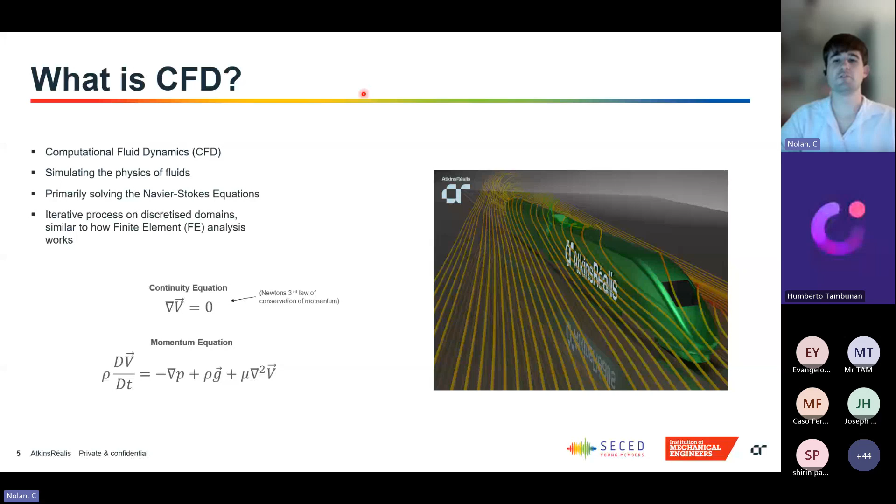So what is CFD? CFD stands for computational fluid dynamics. That basically means simulating the physics of fluids. This normally means solving the Navier-Stokes equations. There's lots of other equations and physics that can be solved in CFD, but primarily it's the Navier-Stokes equations, which are classically unsolvable analytically. So instead we use a computational process where we're iterating to get towards the correct result. This uses discretized domains, using finite volume approximation, which is quite similar to how finite element analysis works with finite approximations, and using an iterative process and making sure that you're converging on the correct result.

So some of the motivations for CFD: we can use it for lots of different applications, normally in project design or safety assessments or performance assessments, or looking at ways to optimize different designs. One of the things that we find works best for CFD is when we come in at an early stage in the concept phase. So looking at making a design more efficient or perform better, or highlighting some of the weaknesses in the design or providing some remediation to the current design to improve its performance. But that does require either the client or the engineering team that we're working with to have a very clear definition of what performance criteria they're trying to meet.

So sometimes this comes from your standards. It needs to meet the standard for it to pass. And sometimes it's a bit more complicated. Sometimes at the early phase, the client isn't really sure exactly what they mean when they say they want it to perform well. So part of our job is trying to help the client understand what they can expect from the CFD experiment, what sort of data output they'll be getting, and what criteria they're hoping to achieve in that.

One of the big drawbacks of CFD as well is understanding the uncertainties involved. We're running these simulations and we get some results, but we never know exactly how accurate they are. So a lot of our work goes into designing the simulation and looking at all of our different inputs and understanding what effect changing different inputs has on the final result. And again, it's really important to understand what our output is going to be at that phase so that we can see, okay, if we change the time step, if we change the physics models, what effect does that have on the specific output that we're concerned with? And that allows us to give more robust simulations without having to do a full experimental campaign to validate all of our simulations.

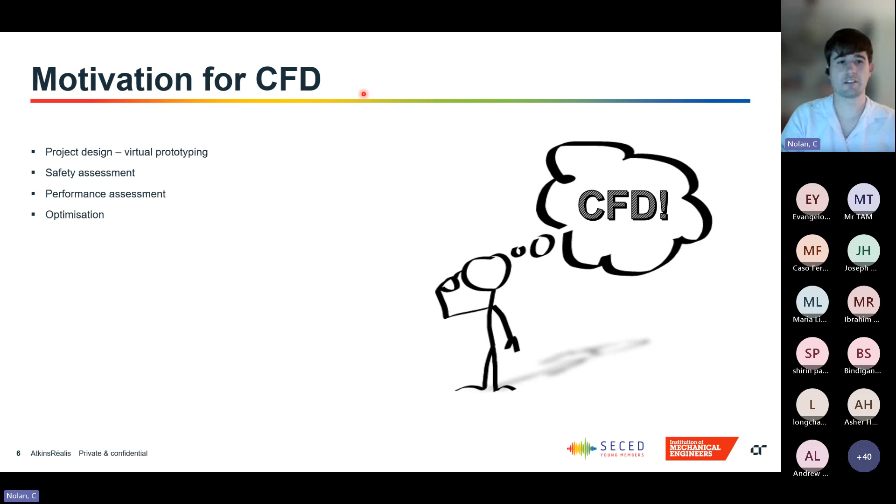So when we do start a project, there's a bunch of technical considerations that we need to think about. The first one, obviously the main one, is what physics are involved in the problem. So as I said earlier, there's so many different types of physics models that can be applied to modern CFD softwares. And if we turned all of them on, it might give you a more accurate result, but what's actually going to happen is the whole solution is just going to grind to a halt. It's not feasible to do every single physics model all at the same time.

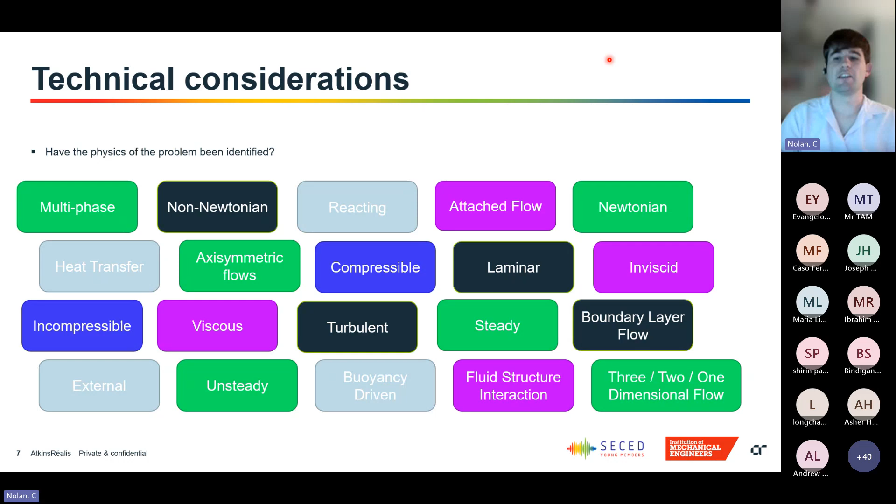So at the early stages, we need to identify what are the main physics that are going to be influencing the problem that we're working on. So is it a heat transfer problem? Is it a buoyancy problem? Is it non-Newtonian fluids? Is it multi-phase? Things like that. And understanding which ones are the important ones and which ones we can ignore.

In the same way, if we were looking at a road vehicle, say, we would make a big box, which would be our air, and then we would cut the vehicle out of that box, and you would be left with this sort of inverse, like a box with a car-shaped hole in it, and then you would simulate the flow over that. So the solid geometry that we're using is actually the fluid, rather than the structure that would be simulated.

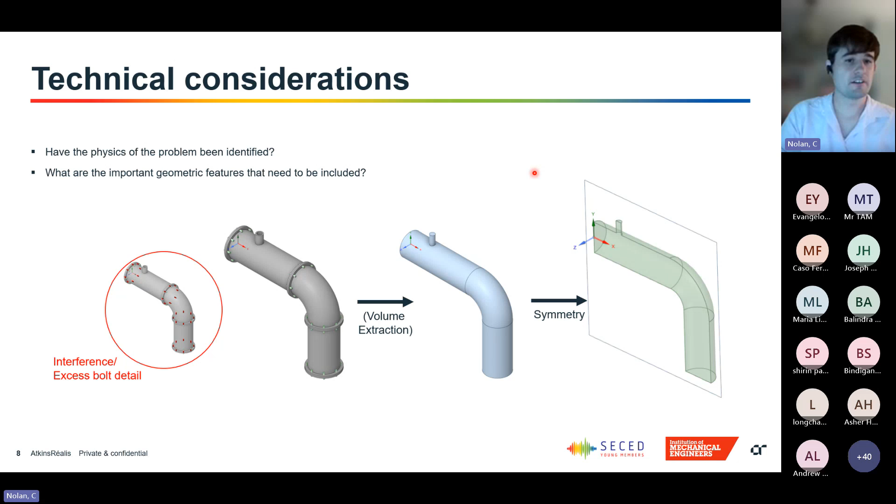And again, having a good understanding of what the client wants as an output is very helpful in this stage, to understand what detail is going to be relevant to the solution. So looking at surface roughnesses and things like that. And for this example, we're able to implement some symmetry. Obviously the pipe's symmetrical, so that allows us to cut down on some of the computational complexity that's going on.

And then one of our final technical considerations at the early stages is the mesh. As I've touched on before, we have to discretize the domains. That means chopping it up into either cubes or polyhedrons or whatever shape you want, really. And what we find is as you make the cells smaller, you're able to better resolve the gradients, whether that's a pressure gradient or a velocity gradient or a temperature gradient or whatever it is that you're trying to solve. However, it's not feasible to have tiny cells everywhere because that's going to really increase your computational cost. It's not unusual for a solve to be 6 to 10 hours. These aren't quick things that get turned around in a matter of minutes.

So it's really important to focus the computational effort around the bits that are important. This goes back to where having a really clearly defined scope and a real focus on what the output needs to be at an early stage allows you to better target your computational resource to exactly what the problem is going to be. And we do a lot of testing on this, so we would often do mesh dependency studies where you're looking at what's the minimum cell size required to resolve this gradient correctly.

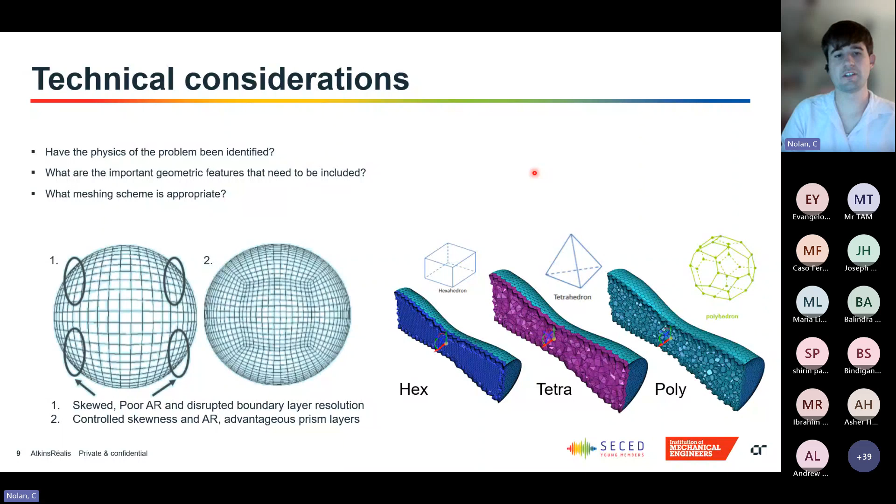So what we tend to try and show is that if we take a coarse cell and then we slowly make that cell smaller and smaller, so we make the mesh finer and finer, focusing the mesh on the important regions, we want to see that the solution converges onto a set solution, and then it becomes independent of what the mesh is doing. And that's the best scenario, that you have a completely independent answer to whatever mesh you're putting on. So that's an introduction to some of the technical considerations that we think about when we first start a CFD study. I'm now going to move on to a short case study.

Well, obviously there's a lot of complex physics going on in this scenario. So we have compressed air, how that expands out into the surrounding environment, and we also have this fluid structure interaction. So how do we make sure that the fluid is properly interfacing with the structure?

Now, when we're building this sort of investigation, we know that there's going to be a lot of different things that we want to try, different physics models, different time steps, different meshes, whatever. So it's important to have some sort of datum that we can measure all of these against. So ideally, in an ideal world, you would have experimental results either from a paper or from some physical testing that had already happened at the site or whatever it is that you're working on, that you can then compare some of your prelim simulations to and fine-tune all of these settings to give you the most accurate result.

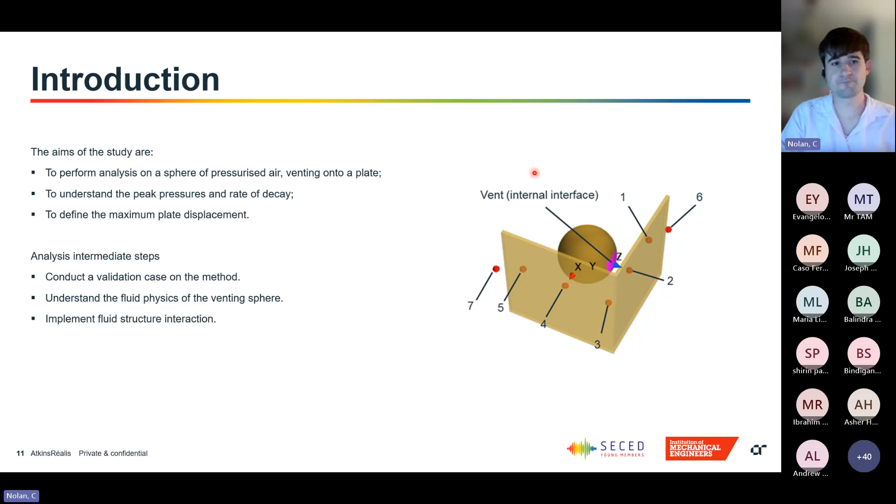So if that were the case, again, we would just go back to trying to define what the scope is and understand the differences between all the settings, and hopefully find something that provides a reasonably robust solution. In this case, however, we do have a validation paper. So the paper that we're going to be using is from the 1970s. It was a NASA paper by Esparza and Baker.

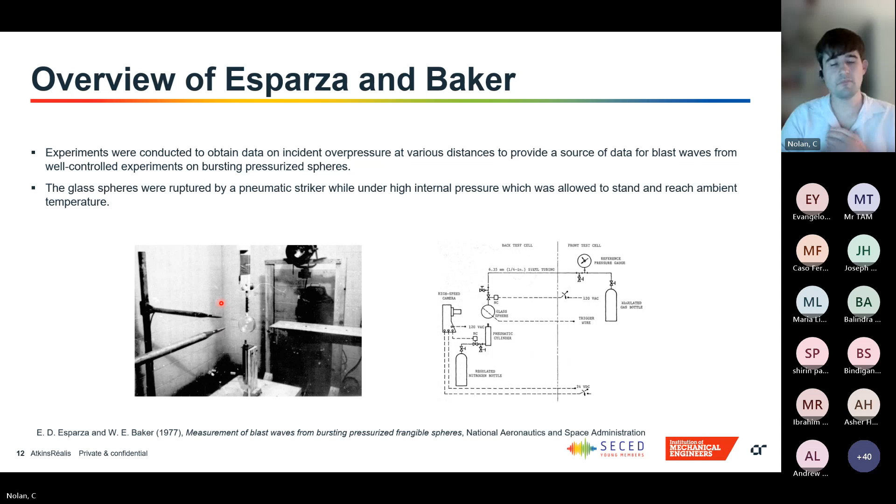So in this case, they used glass spheres and they refilled them with pressurized gas. They then allowed that gas to cool back to room temperature. And then they were using a pneumatic cylinder to smash this glass. And then you can see they have two pressure probes here, set different distances from the glass. And as the compressed air expands out, it transiently measures the pressure.

So the specific case that we're going to look at is compressed air. So it was a 51 millimeter sphere of glass, that's internal diameter, at 52.5 atmospheres. And the two measurement locations were 140 millimeters and 165 millimeters. And these are to measure the blast wave as it propagates out of the sphere.

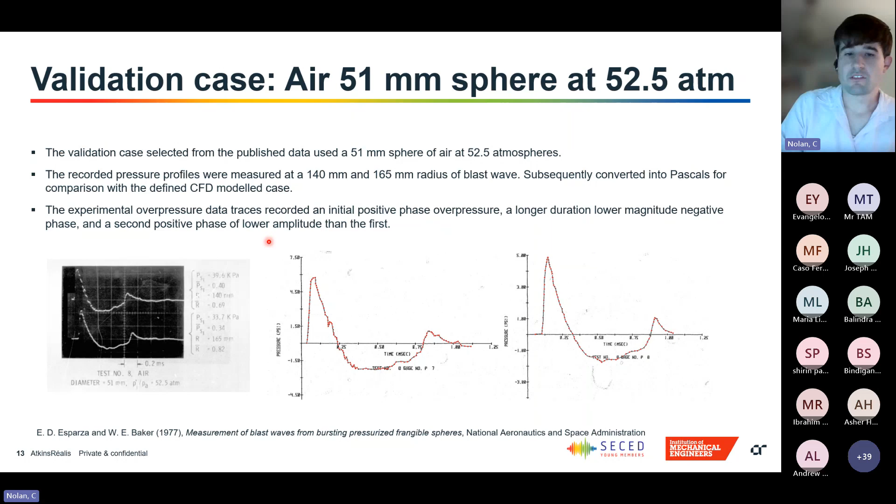So I was already aware coming into this that meshing was going to be one of the main challenges in the initial setup, at least. Because as I said, the pressure wave is very thin, and it's not practical to have that cell size everywhere. Luckily, our CFD software that we're using, STAR-CCM+ at least, has some very clever meshing tools.

So one of the things that we were able to do was introduce what's called an adaptive mesh. So here we can look at a certain scalar, and you can say, okay, if it's above this, or if it's between this range, or if it's below this range, or whatever you want, I would like you to add more cells or coarsen some more cells. And this can be done every time step, or it can be done every 5 time steps, or whatever.

It's quite a flexible tool that allows you to track things that are moving through the domain without having cells everywhere. Because obviously we can't have static refinements in this either, because the pressure wave is moving through the domain. So two of the main ones that came to my mind, at least when looking at this, were density gradients and pressure gradients. So obviously, as this wave propagates out, we're going to be getting a steep pressure or density gradient.

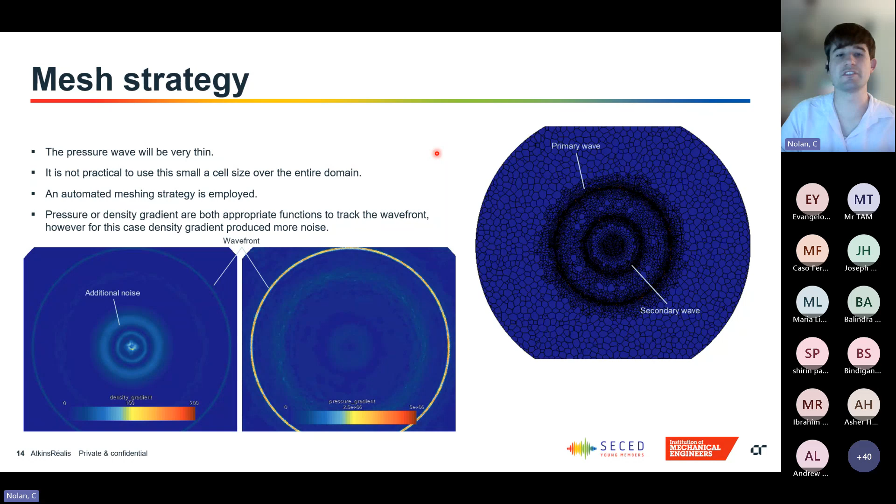And by no means is this one method good for all things. It's very problem specific. But then on the right here, we can see an example of how the mesh refines around the primary wave and around the secondary wave, but kind of coarsens up everywhere else, where the flow is not really moving at all.

So once we've got the meshing sorted out, we were also able to test a bunch of other things. So looking at turbulence model and solver precision and our gas assumptions, spatial temporal schemes, time step dependencies. Obviously, we looked at mesh dependency, all these things. And we were able to work out which ones are the most appropriate. And I'm deliberately not going into too much detail on the exact setup that we used, because I think it's really important that all of these inputs are very problem specific.

I don't want people to come away from this saying, oh, if I want to model compressed gas expansion, these are the things that I should be using to set up. It's really important to target all of your input parameters to your specific problem. And we should always be doing these dependency assessments for whatever project it is we're working on.

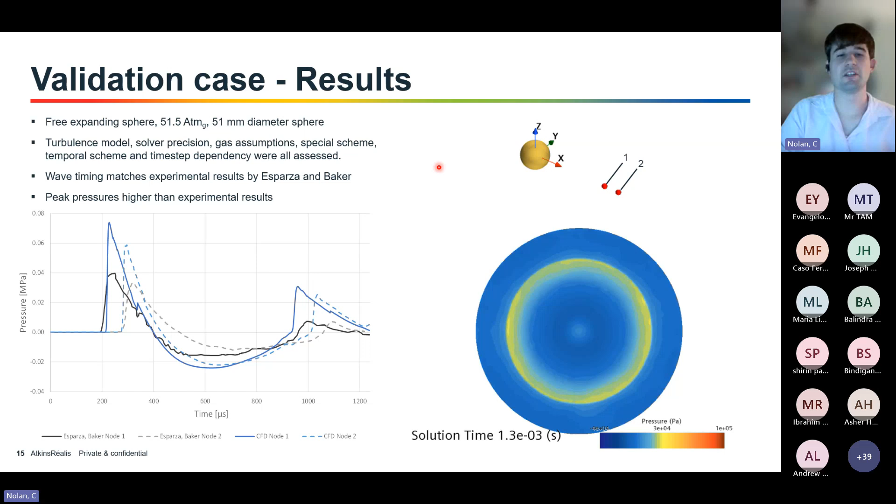So now we're going to move on and increase the complexity of our simulation. Now that we have this strong foundation simulation based on experimental results, we're going to step up the complexity slightly. So now, instead of letting the gas expand freely, we're going to make a solid wall around the outside and have just a small hole for it to escape through.

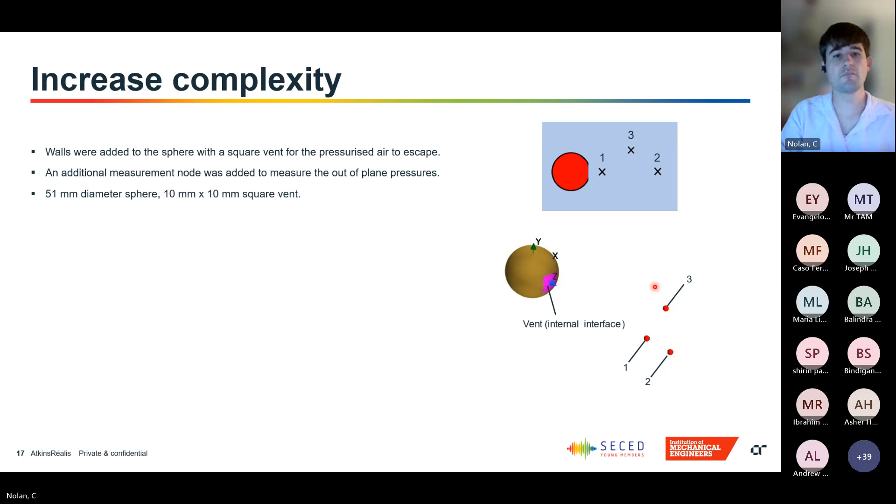So our vent here was 10 millimeters by 10 millimeters squared. And we added an additional node just slightly off plane to try and capture any of the pressure waves outside of that. So again, here we see the pressure expanding, and as we saw previously, you see a big peak as that primary wave hits each node. It actually reaches node 3 slightly earlier than node 2 because it's slightly closer

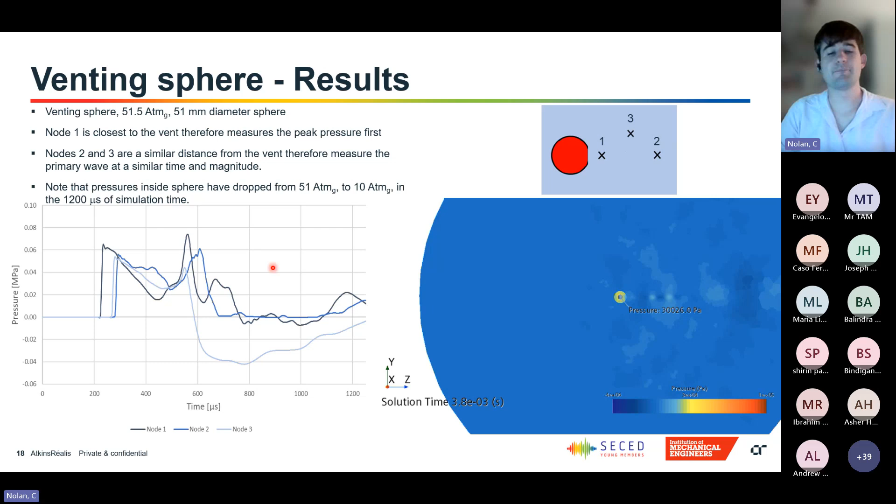radially. But then what we don't see is the decay that we saw before with the free expanding case. We see this sort of much more unsteady oscillation in the pressure. And what we actually ended up simulating was something close to an underexpanded jet, where you get a series of Mach disks forming that slowly move as the pressure inside the sphere reduces.

They slowly move, and we're measuring the pressure at fixed nodes. So as these Mach disks move through the nodes, you get this unsteady pressure at the specific points. We're also able to measure the rate of depressurization inside the sphere. But again, reasonably happy with how these results were looking.

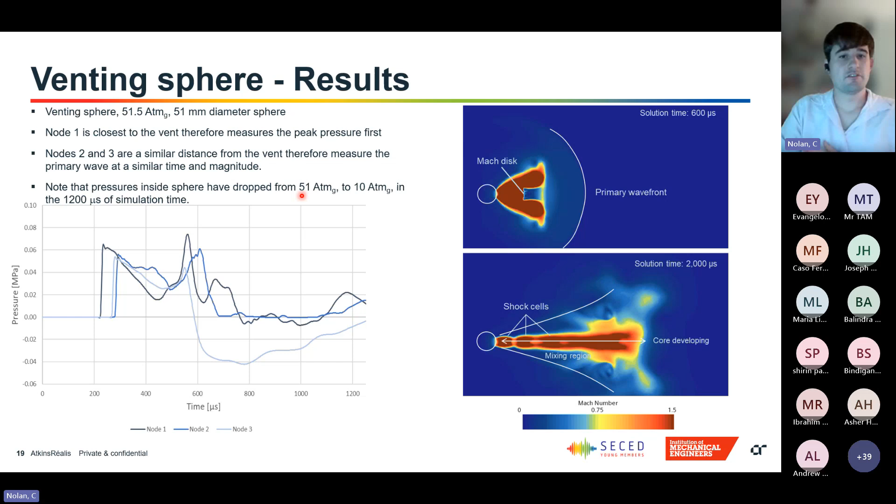And for that reason, we used what's called one-way coupling. So that essentially allows the fluid to impart forces and pressures onto the plate, but the deflection of the plate doesn't then influence the fluid. So if the plate's oscillating or whatever, that doesn't induce oscillations in the flow.

That is possible in the solver, but for the short impulse pressures that we're measuring and the stiffness in the plate, we're not expecting to see that. So this is one of the assumptions that we made where we set it to one-way coupling.

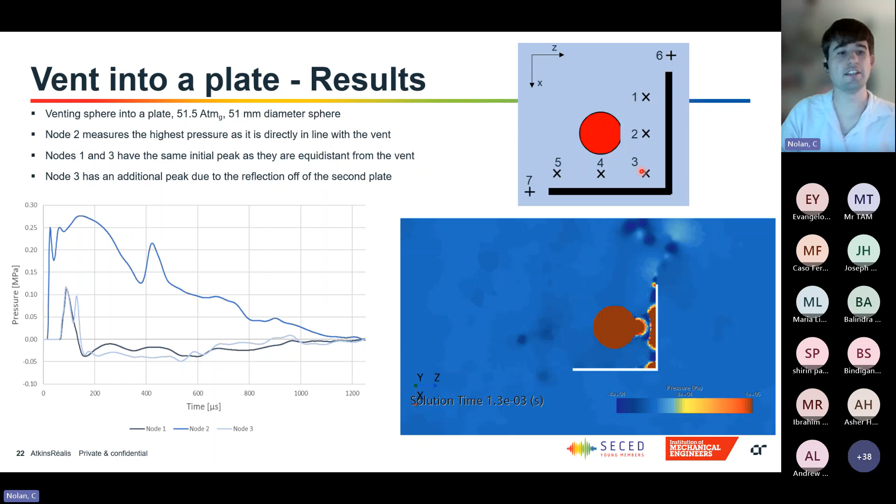You then see the primary pressure wave at nodes 1 and 3 comes at the same time, because they're equidistant from the vent. But at node 3, you see this second peak that comes shortly after the first. And again, this is as the flow oscillates around this corner, it gets concentrated in on node 3. So you get this second peak, which is like the reflections going on.

We're also able to measure the pressures and temperatures inside the sphere. So again, we put a node in the center. And one of the interesting things that you see here is that the pressure stays constant for about 100 microseconds.

And that's actually as the simulation starts, the sphere obviously starts fully pressurized, and then you have this vent, and it actually takes a while for that wave to propagate back into the sphere. So you don't see any change in the center of the sphere for a short time. And then as it decays, you see this unsteady decay, and that is again because that pressure wave is bouncing around inside the sphere. So it's not a nice smooth decay that you might expect for a vessel that's venting this pressurized air.

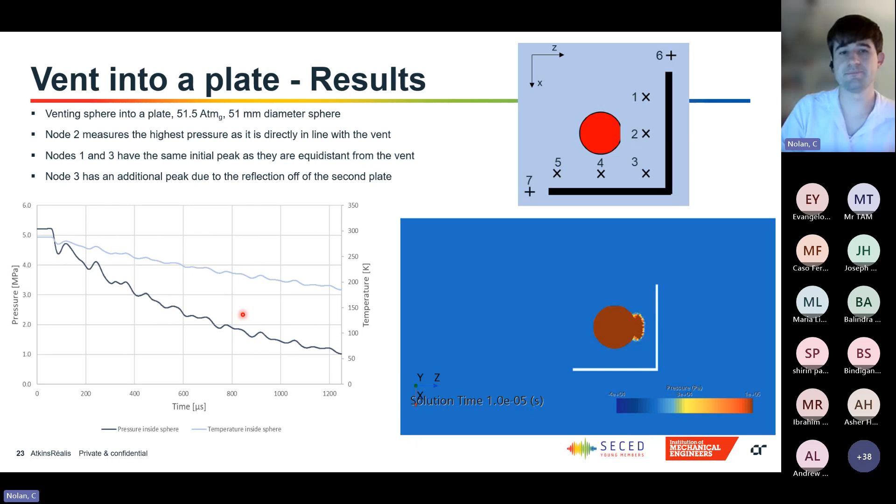And again, moving on to look at the plate. So the maximum force in the plate's in the Z direction, which is to be expected because that's the direction of the vent. We can see the maximum displacement is happening in the middle, but the maximum displacement happens at around 250 microseconds, which is quite a significant time after the initial impulse. So it's quite a delayed response in that.

And the maximum displacement is around 0.3 millimeters. So again, it's not going to be enough to have a huge influence on the fluid. So again, this gives us confidence that our assumption that we can use one-way coupling is acceptable. And we can see it decays. Because we're looking at a magnitude on the whole plate, you don't see the rebound as much. But it's sort of as it passes through zero, you see the deflection elsewhere picks up.

So the displacement chart doesn't necessarily look exactly how you'd expect it to. But we were able to capture the peak. And then with the stress, again, it wasn't the primary concern of the study, but we were able to capture the peak stresses. And you can see they're very noisy.

And again, this is just because of the resolution of the mesh that we went with, because the stresses are around the edges and the cells around the edges aren't fine enough to properly capture that. But again, we can use this to justify that our setup is correct and that the peak stresses are where we would expect to see them.

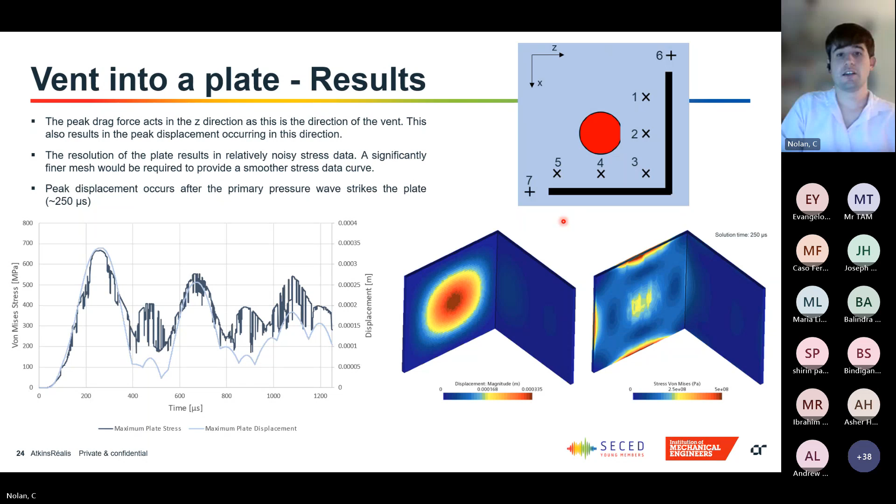So the outcomes of the study: we've gone through and discussed how to iteratively build up a simulation, building upon a strong foundation from a validation case. We've shown how to implement some fluid structure interactions and how that's able to work. And we were able to analyze the pressures as they reduce from this venting sphere.

Now, this can be applied to lots of different cases. It can be used to quantify loads on a new structure. It can be used as a safety case for an existing design, or if we forget about the structural side for a second, we could just use it to solely look at the fluid pressures and how different shapes can concentrate pressure. So there's lots of different applications for even just a simple case like this. And there's lots of applications for CFD beyond this as well.

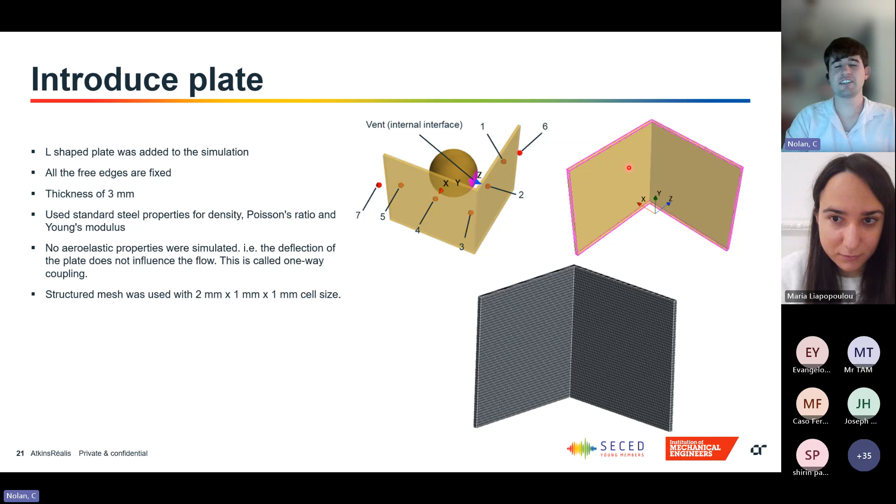To begin with, we tried to keep the simulations quite short, the solve time on them. So we're sticking to around 3 or 4 hours for those cases. As we increase the complexity, obviously the solve time also increases. So for the final case where we were looking at the full fluid structure interaction, we were getting up towards like 15, 20 hours for the solve.

Obviously, yeah, it's a balance, right? The level of complexity that you put in then dictates the solve time. So it is trying to find that balance where you're putting in enough complexity to accurately answer the question without having it take unacceptably long for the client, basically. So we try and keep them to around half a day at max most of the time.

Okay, great. Just to follow up on this, what kind of computational resources do you need to run these analyses? Do you have access to HPC? We're not just running these on our laptops. Yeah, so we have HPCs that we can remote into and run them. So our current license allows us to go up to 1,000 cores. And depending on the client and the work, we can also use cloud compute as well. So STAR-CCM+ has their own cloud compute servers that we're able to use.

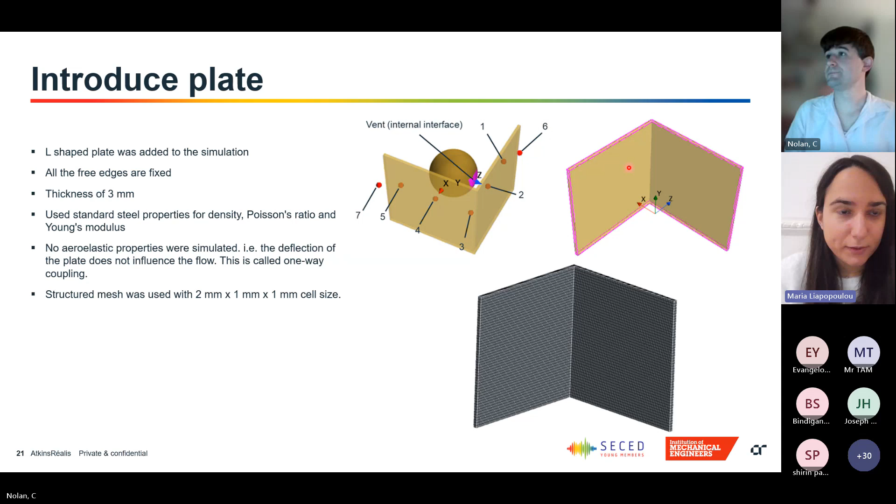Great. Okay, is there any other question from the audience? Yes, Andrew? Yeah, I'd like to ask a question. So there is the fluid dynamics solver that takes care of the fluid domain, and I don't pretend to understand that. But in the case you had there, you had a plate, which is a solid region. Is there a solver for that? Is that incorporated in the same software, or is it a different piece of software that you're using?

So it's all incorporated into the same one. Most commercial softwares now have the ability to do at least simple structural solves. It's not going to be as detailed or as accurate as a dedicated solid solver. But yeah, I think STAR-CCM+ definitely has the capability.

I know ANSYS allows you to take the outputs from your Fluent simulation and import it into ANSYS Mechanical. So I think the commercial software at least is trying to target towards being able to do a bit of everything. Yeah, and from the other direction as well, I know some of the structural solvers are trying to introduce some simple fluids to try and capture that. Okay, thank you for that.